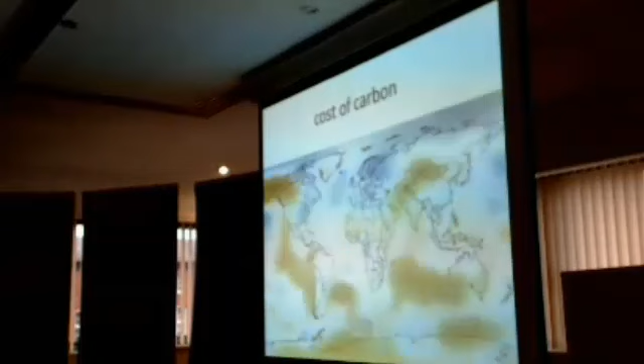It's like everything you know and love that you just see gets swept away in the air. The wind is just shifting continuously. I've been through several years like this, but not this long and not this wet. So this is the cost of carbon pollution. We may not realize it, but climate change is affecting us, all of us, right now. We're seeing it all over the news, from the bottom of the oceans to the tops of the mountains, and in the faces of victims across the globe. How did we get here? Let's start at the beginning. It's 1824, and French physicist Joseph Fourier uses a vase and some cork to figure out that there's an atmosphere trapping heat and making the Earth habitable. Right about this time, we also hit the Industrial Revolution, the birth of large-scale manufacturing and coal power, and the beginning of the carbon boom. 1896 rolls around, and a couple scientists figure out that CO2 from burning all that oil and coal could affect global temperatures. The numbers based on these fuel consumption rates showed that we had a few thousand years before we had to worry. So we didn't. Then the 1960s came, and things started getting ugly. No, worse. Charles Keeling had captured enough data to determine that carbon levels in the air were directly related to the amount of fossil fuel burned, and that levels were going up. In 2010, NASA declared 2000 to 2009 the warmest decade on record. But hey, what does NASA know? One small step for man. Oh yeah, that. And that's sort of the way it's gone. Which brings us to today. Today we live in a world of extreme erratic weather. And here's the kicker, it's costing us big time, right now. In 2013, insurance losses from flooding in Central Europe were estimated at $3.9 billion. In Australia, the 2013 Dunalley fire alone cost roughly $87 million. And these costs don't just end with the massive damage control bills.

The effects ripple through our lives, costing us in other ways. Take Hurricane Sandy, for example. The initial damages cost roughly $65 billion. But what about the small business owners who either lost merchandise, customers, or their entire business because of flooding?

And it's not just money. Some of us are paying with lives and livelihood. Others are paying in pain, damage, and suffering. In fact, the climate crisis is recognized as one of the world's leading threats to political stability and national security.

The point is, we are all paying today for carbon pollution. Every one of us. We're paying in dollars, in lives, in jobs, in lifestyles, in every way imaginable. This is not a theory. It's not an opinion. This is the cost of carbon.

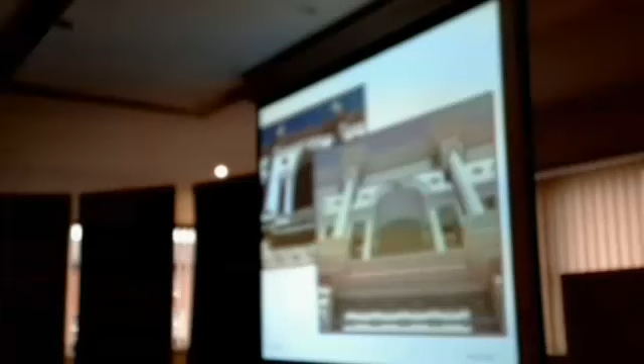What I want to move into now is the material library with Revit. This is where we start to take modeling, and by using the material library, we can actually start putting out specifications. We can begin to get it so that every time something appears in the building—a piece of concrete comes into the spec, if a carpenter is working, his work comes in—so we can begin to get the specification generated out of the work, out of the model.

This has big implications. There's an example showing how it is populated so that the different parts of text come in, and this is quite similar to how the BIM toolkit will work, I imagine.

Where this becomes incredible is looking at time, price, and cost. Dynamically, you can see as a wall is being built, the different prices are populating the different areas. Change a wall from concrete to timber, and the concrete goes out and the carpenter comes in. This is the dynamic use of specifications and using BIM for the potential it has to offer.

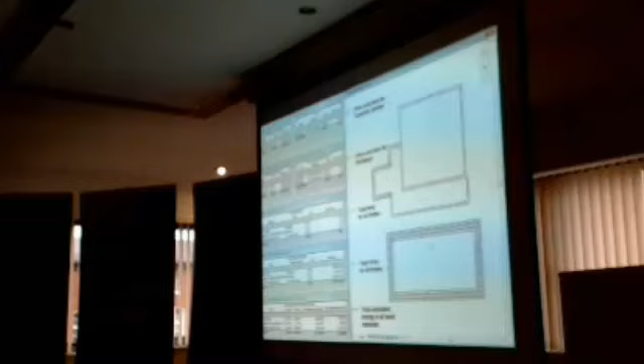Okay, just the credits coming up now.

So if we move on to the next slide, what we're saying is that this used to be how we would hand over a building. We'd give them all of these boxes with drawings, all the specifications, all the reports, and the facilities manager would at a later stage have to burrow in through all of this information to find the serial number of a valve or whatever.

This does not work, and we need to start looking at methods to digitalize the whole workflow. If we move to the next slide, there are three pillars of excellence: post-occupancy evaluation, evidence-based design, and better project briefing. We need to employ these methods in order to give us better information and better design.

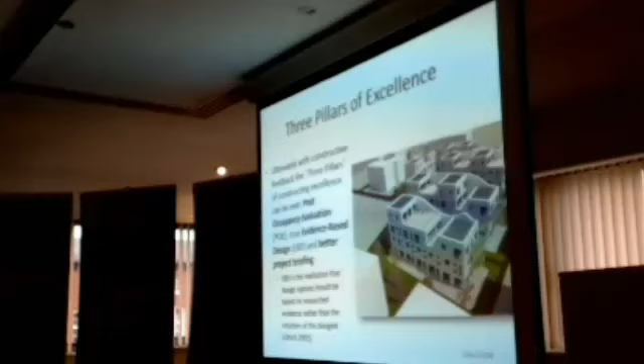Within modeling, moving on to the apps box, we have applications that can help us in how we look at our building. We also have bots, which are little Google search engines that, once you place a window in a building, can go off and find all the windows out in the market that fit that size. As you go through your levels of information and detail, and decide the window has two opening panes, is aluminium or timber or whatever, that shortlist gets trimmed down and down until, when the contractor takes it over, he can just right click and say I can use this window manufacturer or that one.

If we move on to the next slide, small to medium businesses are 99% of the construction sector. So people need to be fluid and need to be able to adapt and go with this. And I believe that being the size we are, they can do this.

The next slide. As we begin to model, we can better inform through performance, through analysis, how we make our decisions, giving us better informed design.

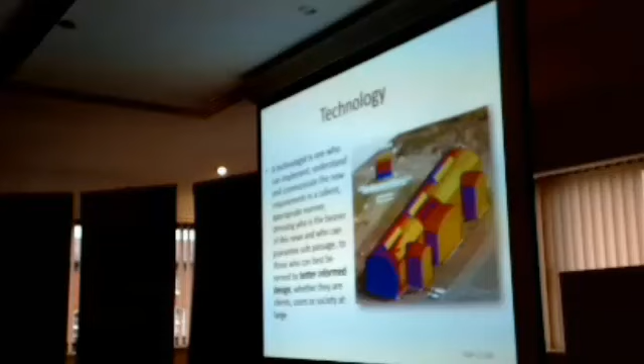Next slide is a student project from a 1940s building which is being renovated.

Using a drone and capture software, they were able to capture the geometry of the building. In their work on the building, they were able to go into the inventory of carbon and energy, and by putting the carbon values on the different elements in the building, we could begin to extract how much carbon was actually in this building.

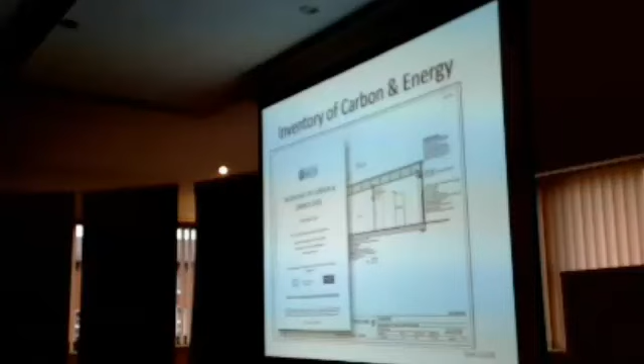Next slide, you can see a typical page in this inventory.

Relating this to Revit or to BIM, within the BIM package you can go in and actually open the properties in materials, and by default both physical and thermal are turned off. Just turning these on starts to make these properties available to us in our analysis and simulation.

Going into project parameters, next slide, you can actually go in and generate these parameters, for example embodied carbon or embodied energy. Using the inventory, you can put these values in, which then can be extracted into a schedule.

Now some slides are appearing just showing you how you can become immersified in the digital world. The first one shows Recap, which is a capture software that, using a drone, can capture the geometry of an existing building.

This then can be analyzed as a mass. This then can go on to produce your general arrangement drawings, your details. You can show what is being demolished. You can actually show what is being converted.

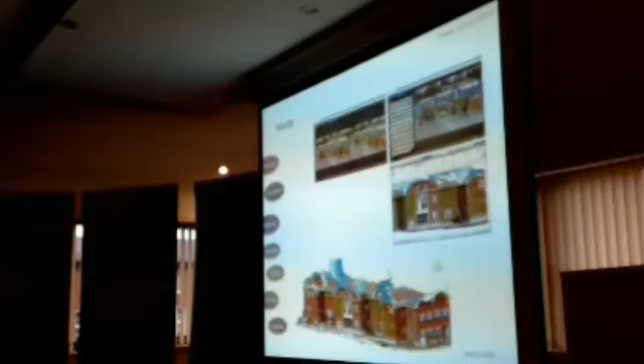Are we on slide 30? Yep, yes, yep, next slide.

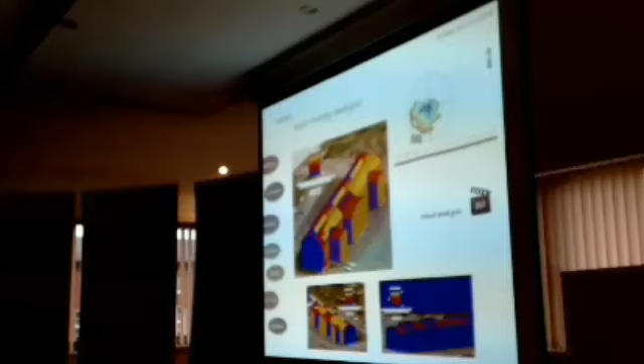Taking that into Navisworks, you can then begin to process. Here we're looking at a new floor being laid, and you're able to go in and timeline that so that you can find out how long it will take for the floor to be laid, etc. How many people, what your materials are, extracting everything you need to know.

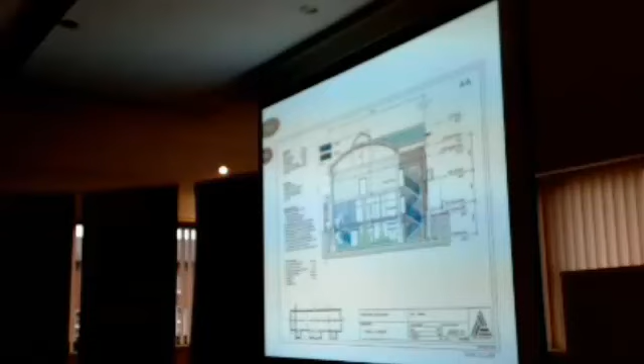Next slide just shows more of that operation. And the slide in this section shows how you can do collision detecting, etc.

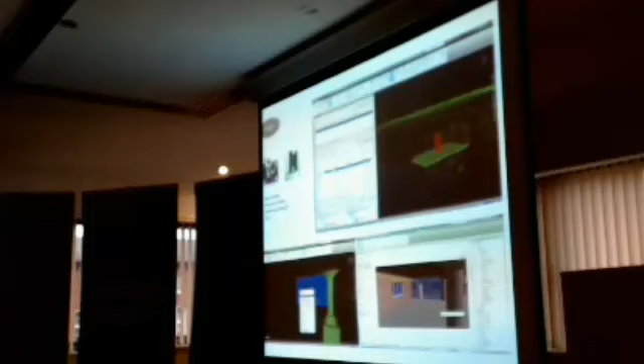Slide 34. Sustainability, energy consumption and embodied carbon appreciation are all a result of poor management and abuse of the finite resources this planet has to offer.

Another project, the next slide, was a biomass algae reactor. Here I took the not very nice decision, but to put everybody in this housing block into effectively a fishbowl.

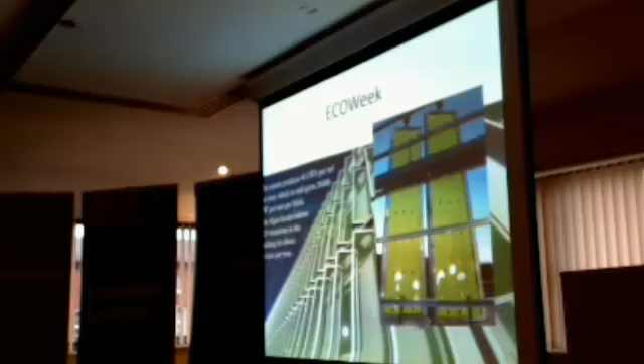Now the reason we were so extreme was because of the numbers backing it up. Going on to the next slide, you can see that such a system could actually save enough energy, 13 tons per year of CO2, and give us 38,000 kilowatts per year per block. Because it's such a small microcosm, it doubles and quadruples faster than any other biofuel.

This was exceptional. There is an example of a building like this down in Hamburg, which is on the next slide, where you can see just how the panels work.

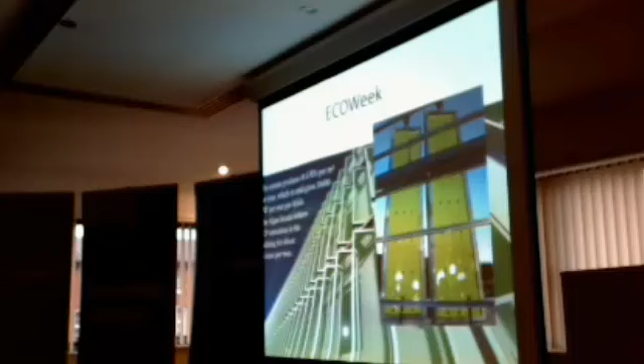And on the next slide, you can see how the refit of this 60s tower block was turned into a nice habitable place to live.

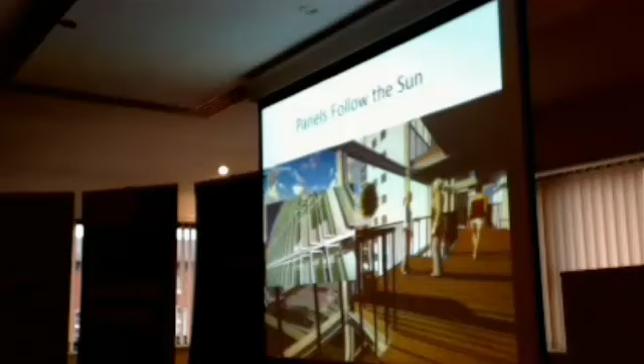Now moving on to augmented reality. I don't know how many of you have kids, but all the kids I know all know that this is a scanner where when you hold the box of Lego onto the scanner, the contents of the box are magically built up on the screen. Now they accept this without any problem.

This technology is available for us to use in the building sector, but we are not using it as much as I would like. If you go on to slide 40, you can see how a lot of manufacturers are now offering furniture where, by using the app, you can see this chair in your room in this color. So you can actually make decisions on whether you want this chair or not. This technology is here now. We should be using it on the building site.

The next slide shows how we can take the model and put it onto our handheld devices. This is a timeline running that shows each element in the building coming in at a number shown at the top of the screen.

So we are controlling how it gets built on site and how it's happening. Coupled with GIS, this gives us the ability to use augmented reality to look at what's happening on the building around us. Put it up to today's date, and holding your iPad or whatever it is, your Google Glass, you can see if you are ahead of schedule or behind schedule. This would be an incredible tool for a site manager, for a project manager. It would take so much of the problems off-site and make it a much better place to be.

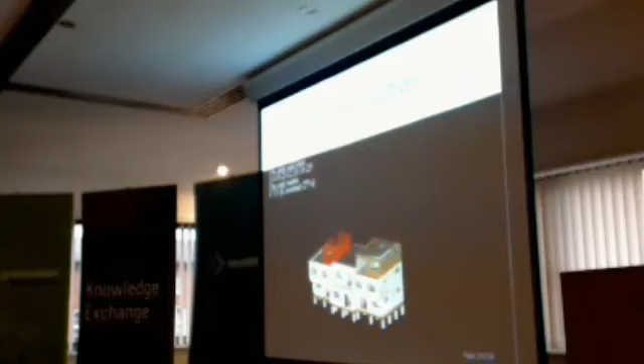On the next slide is a simulation showing student work again, where it is prefabricated apartments, and you are watching, in time, how one block of apartments gets built. It's happening fast because the units are prefabricated, and where the lull comes is where the vertical circulation is being built on site at the back. I would like to go on to the next slide rather than let that finish, because otherwise we run out of time.

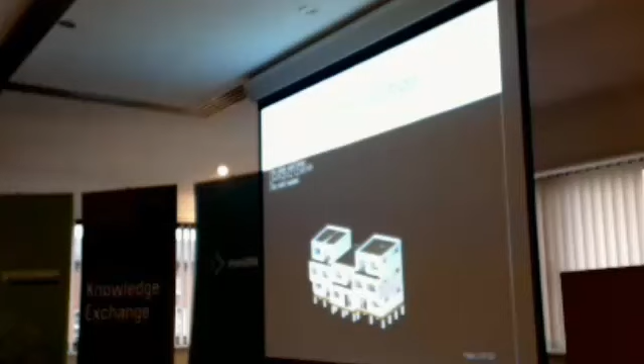In the next slide you can see how the whole site is being developed. The red work is excavations for a car park, and then you can see the foundations coming in for the first set of apartments, followed by the second, and all the time you're looking at a running number up in the top left, which is showing how many days into the site we are and what is happening. So we are back in control as to how we can build and take our buildings onto site.

The student got so carried away here that he took it all the way to planting trees and landscaping at the end. But it means we're back in control of what's happening on site.

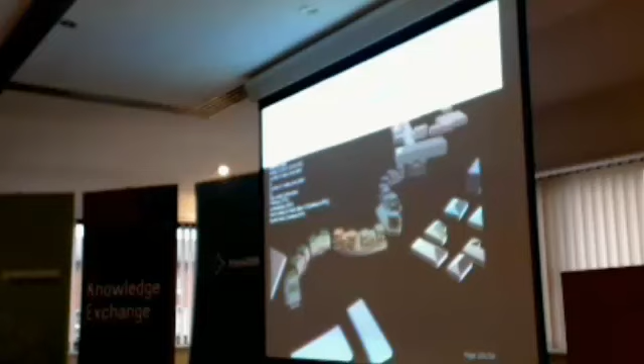I think you get the gist of what's happening.

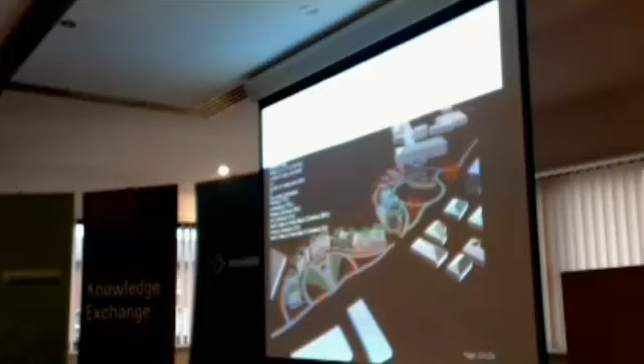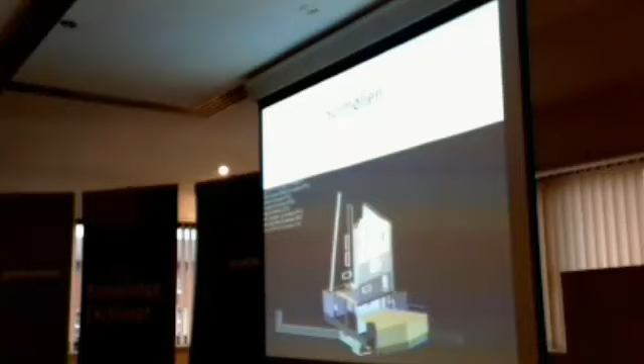So if we take the next one, this is for a building, and the reason I've shown it is because it shows you to what detail you can take your process of construction down to. The gable wall here will be broken all the way down to the timber members, the insulation, the different membranes that go on, just to show you that we're back in control.

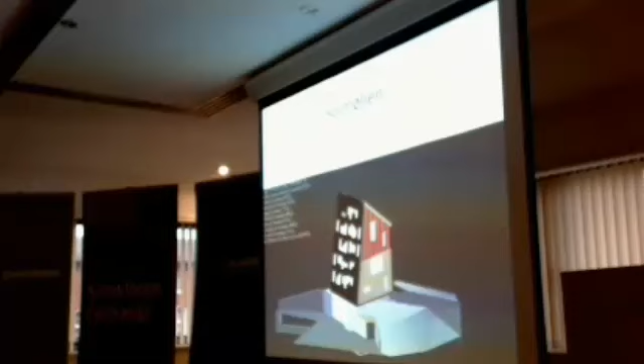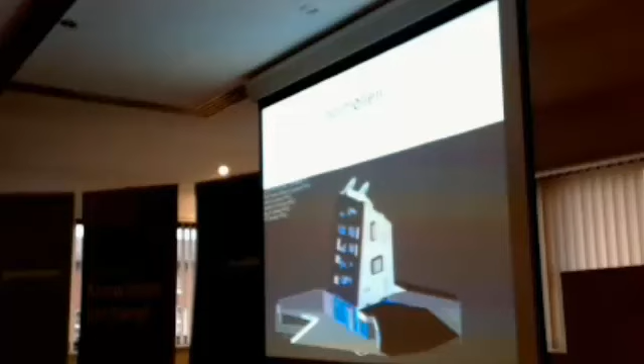So if we go on to the next slide, 45, what we're saying is that there is scalability in this. By doing this, we get back in control of buildability, and it's both sustainable and it's digitalized.

We go on to a new little video, which is the price of carbon. If you run that there, I will take a little breather. It's similar to the first one, with one significant difference.

Your bank account, you keep a close eye on them. You pay for your groceries. You pay for your car. You pay for your stuff. You pay for your roads, your schools, the things we all share. You know what else you're paying for? Carbon pollution. Oh yes, you're paying for carbon.

Science tells us carbon pollution is the leading cause of climate disruption. The burning of dirty energy is raising our planet's temperatures, which makes extreme and erratic weather more likely. The result? We've been living in it. 2012 was the hottest year in the United States since weather scientists started keeping records.

And half of all U.S. counties were declared disaster zones due to last summer's crippling drought. And because of the droughts, wildfires scorched 1.5 times more land than usual. On the East Coast, crazy storms have led to record-breaking flooding. We've always had extreme weather, but now, thanks to carbon pollution, we have weather on steroids.

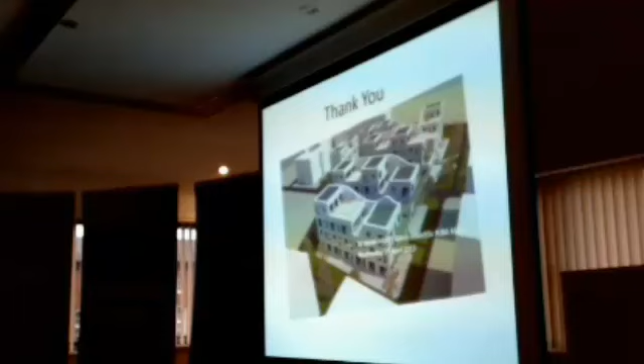And that's the last slide. Next slide, I think. Thank you. Thank you, James. I hope that went okay over there. Absolutely, absolutely, yes.

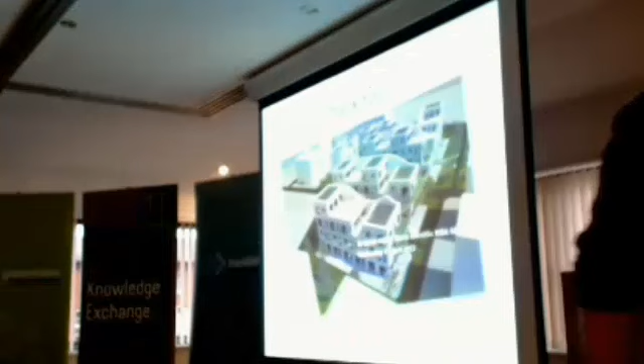No, I think you've bowled them over. Well, many thanks for your time, James. Really appreciate it, and I hope to speak to you in person soon. Thank you, thank you very much, and I'm available if anybody needs to contact me. Okay, thank you very much, thanks James. Bye-bye. Bye. Bye.

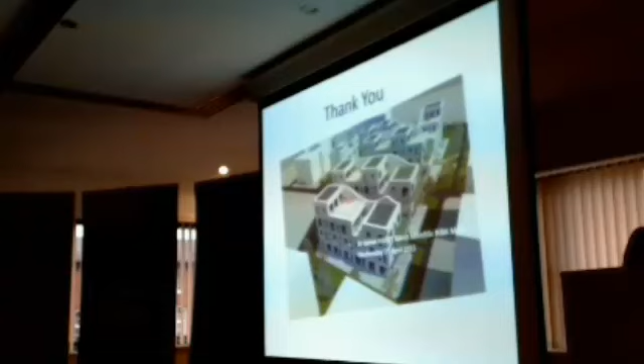That was great. Is Duncan with us? No. I was just wondering whether we could get the people who ran the groups earlier on to come up to stand very briefly and do a bit of a sum up. Yeah? Let me get the groups out.